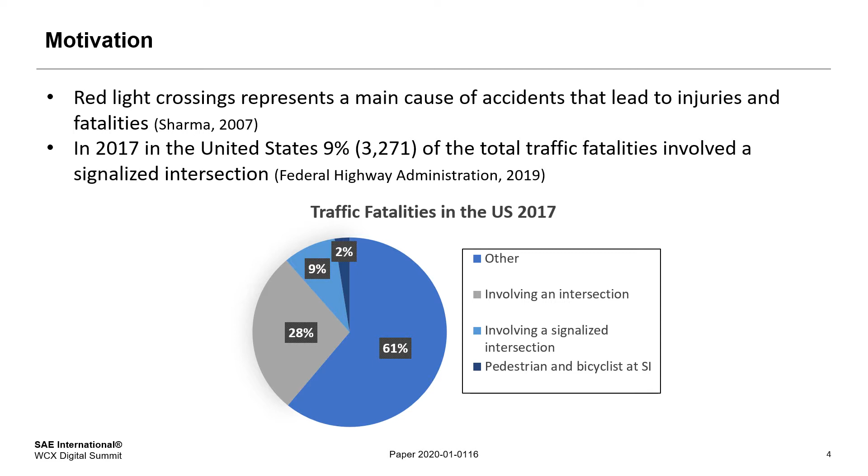Red light crossings are a significant cause of accidents. Just in 2017, 9% of the traffic fatalities had something to do with a signalized intersection in the United States. This is something that we would like to minimize as much as possible. Some manufacturers, like Audi, have started to implement technologies like green light optimized speed advisory, or GLOSA, in their vehicles, and we were wondering what effects these technologies would have on safety.

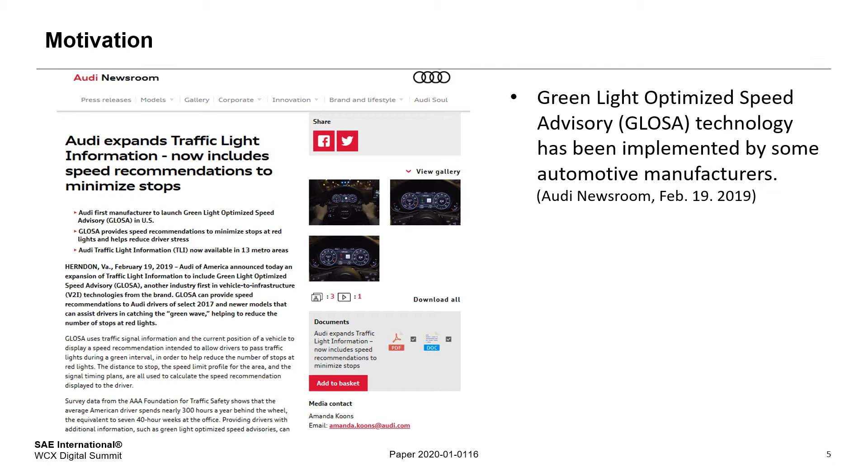The way GLOSA usually works is that typically we will have a roadside unit or cellular device on the intersection that can interface with the controller, and we will have a vehicle that has an onboard unit or cellular device. This would allow for data transfer between the intersection and the vehicle, and information such as the intersection topology, the location, the current phase, and how long the phase is going to last can be transmitted from one side to the other.

After this is done, the vehicle can then process the data and calculate an optimal approaching speed so the vehicle can get to the traffic signal during the green phase of the cycle. There is room for improvement in the sense that few GLOSA studies have taken into consideration actuated traffic signals. Added to this, the negative effects of latencies can also be reduced. Now let's look at the literature review.

Parsonson and Zegeer were able to identify that rear-end collisions and right-angle crashes are a result of dilemma zone exposure. The dilemma zone is an area in which, after an onset of yellow, motorists are not sure if they should continue or stop. This uncertainty increases the risk of an accident. We will look in more detail into this topic later on. Zimmerman was able to mitigate the incursion of vehicles in this zone by controlling signal phases and warning drivers of a possible risk.

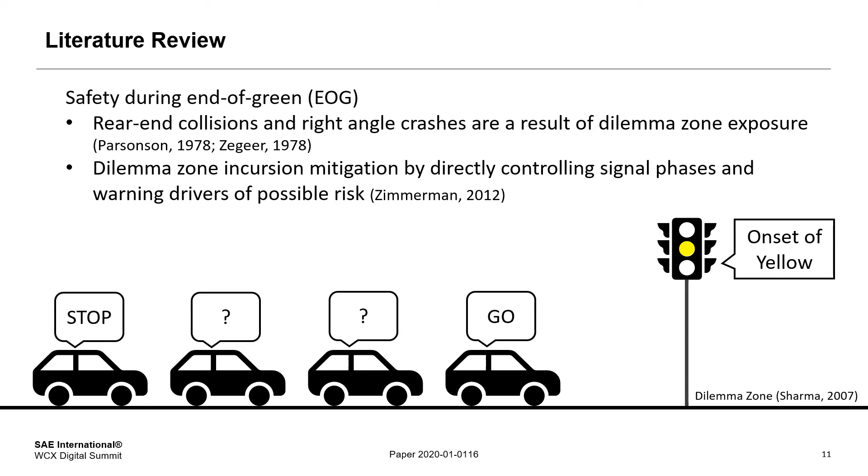Stahlmann found out that GLOSA simulation studies tend to overestimate transmission ranges and message delivery ratios, and it is also important to note that there are GLOSA systems that aim to improve specific aspects, like travel time or fuel consumption.

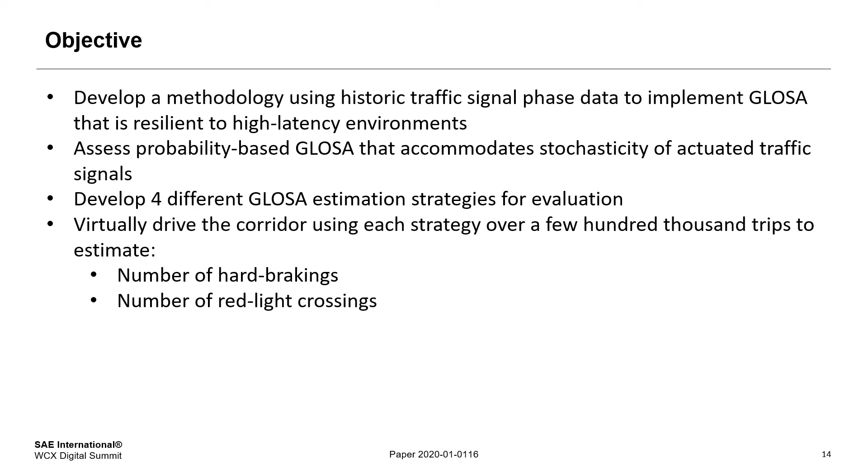The objectives of the study were to develop a GLOSA system that is resilient to high latency environments and that accommodates the stochasticity of actuated traffic signals, to develop four different GLOSA estimation strategies for evaluation, and to virtually drive a corridor using each strategy over a few 100,000 trips to estimate the number of hard braking events and the number of red light crossings.

The novelty of the study is that only a one-time download of historic data is required to provide advisory for the complete route, that the system presents capabilities for actuated traffic signals, and that we're focusing on the effects that the probability-based GLOSA has on safety. Now we can move on to the methodology.

The testing route in which the virtual drives were carried out is a segment of US 231 located in West Lafayette, Indiana, that goes from US 52 to South River Road. You can see in the map all the intersections that are in this segment of the road. And we had two timing plans, one that goes from 8:15 a.m. to 9 a.m. and another one that goes from 9:15 a.m. to 2:45 p.m.

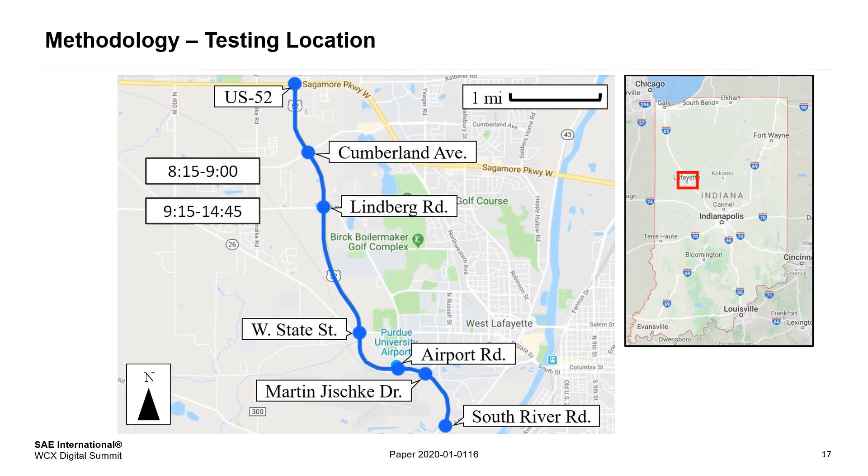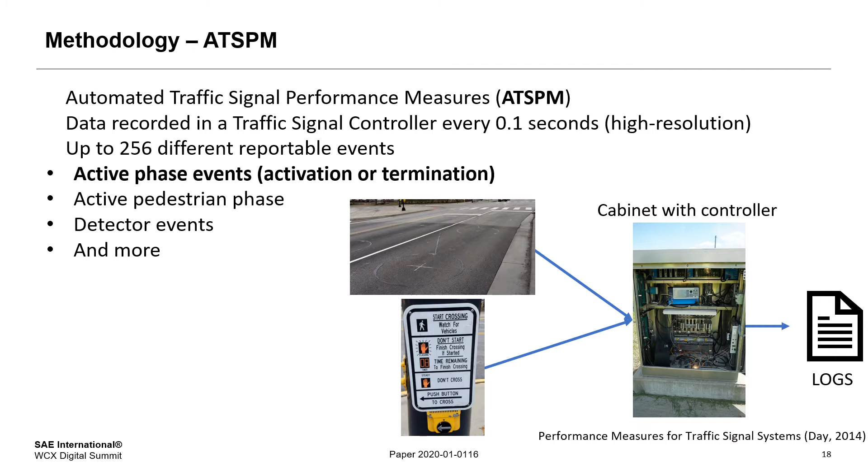To develop the probability-based GLOSA, we needed to access the historic intersection phase events data. So we utilized high-resolution traffic signal controller data, which saves events in log files with a tenth of a second resolution. This way we could know what phases were on at a specific traffic signal at a specific time of day, and we could then calculate probabilities.

For example, if we wanted to travel on Tuesday 19th of March 2019 between 8:15 a.m. and 9 a.m., then we will be looking at the previous week's information with the same time of day, so between 8:15 a.m. and 9 a.m., and the same day of week timing plan. So if we were traveling on a Tuesday, that means we will be looking at events that occurred between Monday and Thursday. This is because the traffic signals have similar timing plans for these days.

Now we're looking at one of the first traffic signal cycles in the current time of day plan when going northbound on Martin Jischke Drive on the Monday before our intended trip. If we focus on a specific time inside the cycle, we can see how different events occur throughout the time of day period. We can see how for the time in cycle 70, one of the first events is a red light. But as we move forward, we start to see different events.

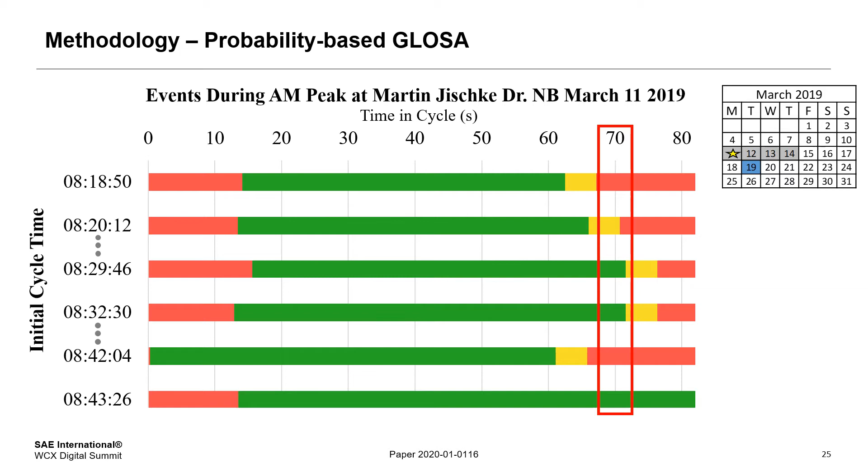At the end, to calculate the probability of the traffic signal to be green at a specific timing cycle, we count how many green events occurred for the entire day of week plan for the same time of day period and divide this number by the total number of cycles that were analyzed. By just looking at a few cycles on Monday 11th, we could predict that the probability of the traffic signal to be green at a time in cycle 70 will be close to 50%.

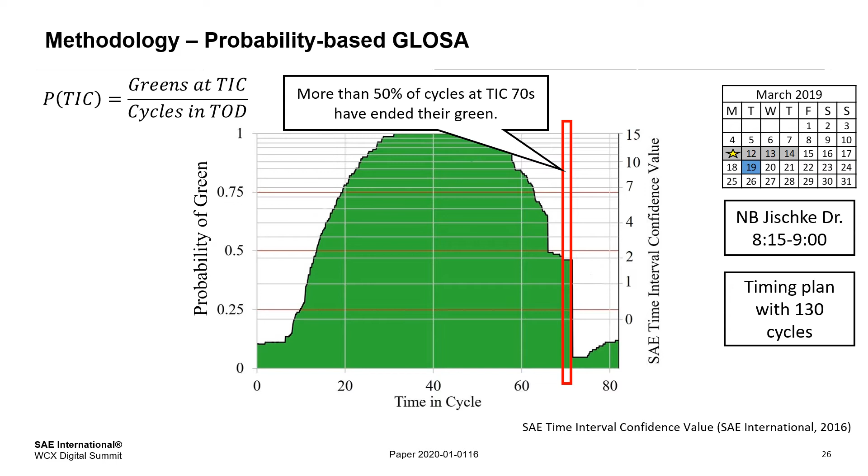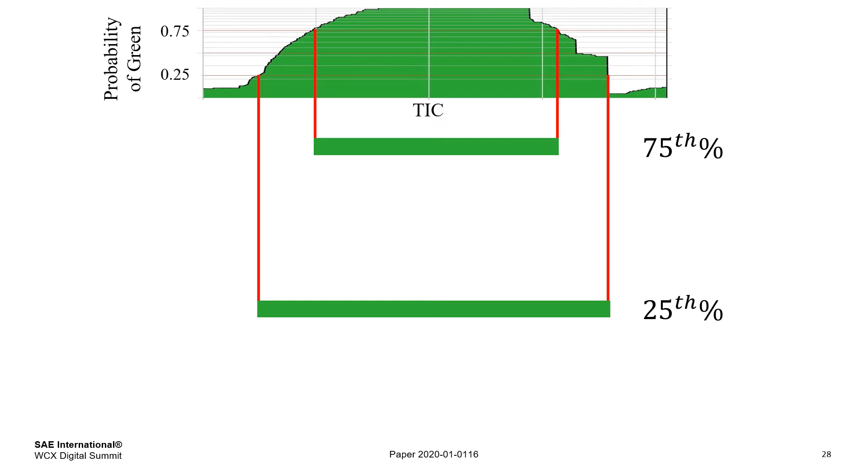Nevertheless, we have to translate the obtained probability profile to a binary advisory. To do so, we make use of thresholds that will make our probability either a green or no green prediction. With a 75th percentile threshold, the predicted green time will look like this. Whereas, with a 25th percentile threshold, the predicted green time will look like this. The different lengths of the expected green time will have different consequences on the advisory outcome.

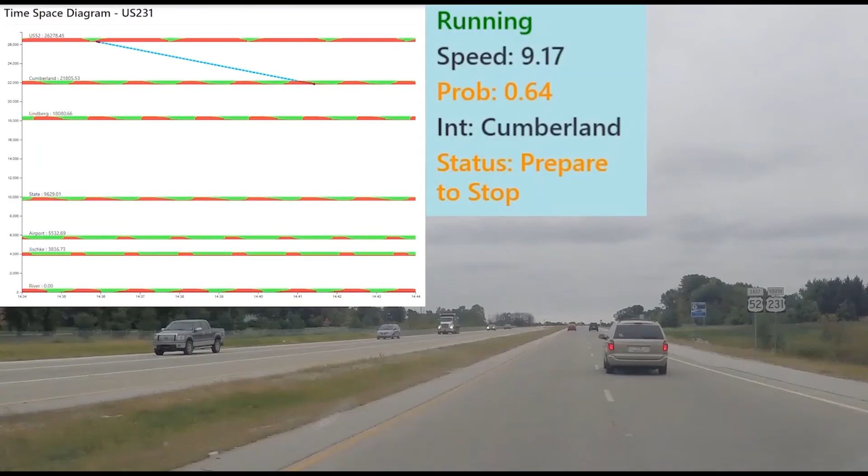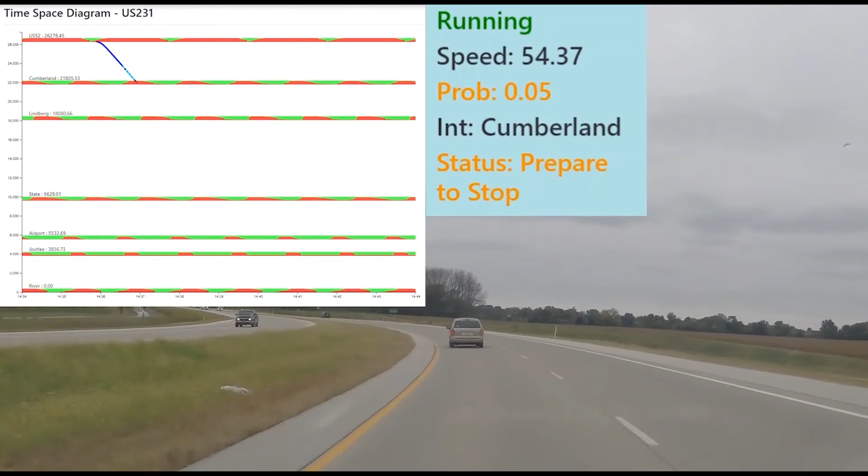This is a short video that shows how the traffic signal phase prediction works. In this case, we are utilizing a 70th percentile threshold to calculate the probabilities. We can see the vehicle's current speed and the current probability of arrival on green. The instant projected trajectory is also shown. For example, now we see a probability of arrival on green close to 0%, so we would expect to arrive on red or yellow. Now, the probability of arrival on green is close to 100%, so we would expect an arrival on green.

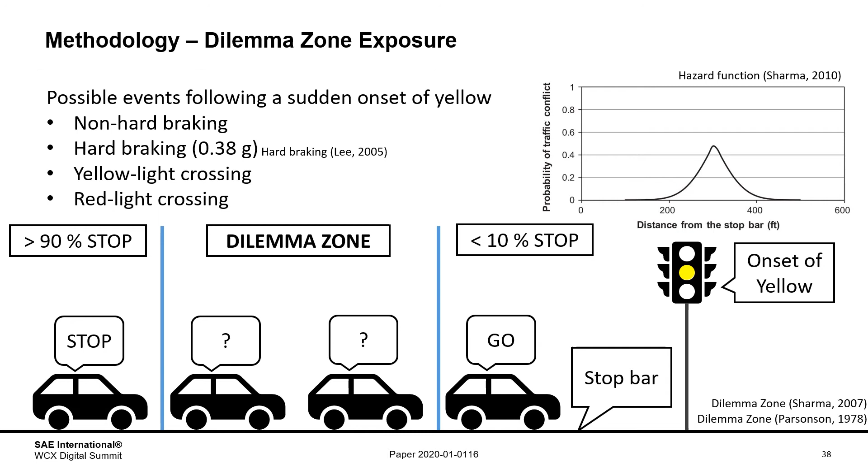We can calculate a vehicle's probability of stopping based on its speed and distance to the stop bar by utilizing a binary logistic regression function that has been designed for light vehicles. If we focus on the most critical point, when 50% of the vehicles would stop, we can obtain a function that provides information on what speed a vehicle needs to be traveling at a certain distance from the stop bar to be located at this critical point.

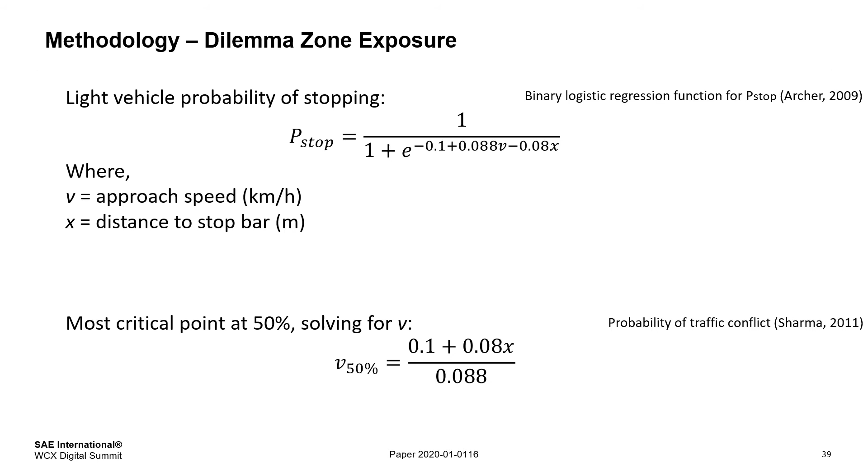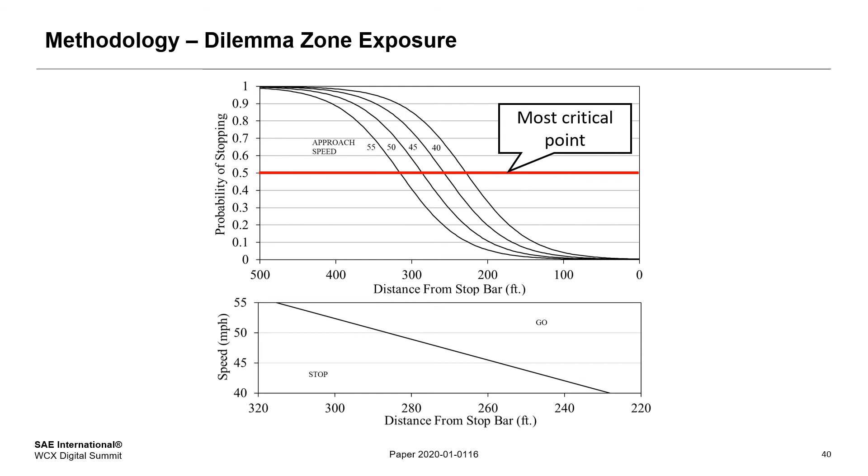Here, we can see the probability of a vehicle to stop depending on their speed and how far away they are from the stop bar. The graph at the bottom shows at what speed a vehicle at a given distance will have a 50% probability of stopping. Vehicles going faster than its speed will be more likely to decide to cross the intersection, whereas vehicles going slower will be more likely to decide to stop.

Regarding the virtual drives, 486,000 trips were driven, phase events were taken from each signal controller's historic data, different GLOSA strategies were tested for each drive, including unadvised, aggressive advisory, balanced advisory, and conservative advisory, and the simulation period was from March 18th to March 21st, 2019. This means that the probabilities were calculated from March 11th to March 14th, 2019.

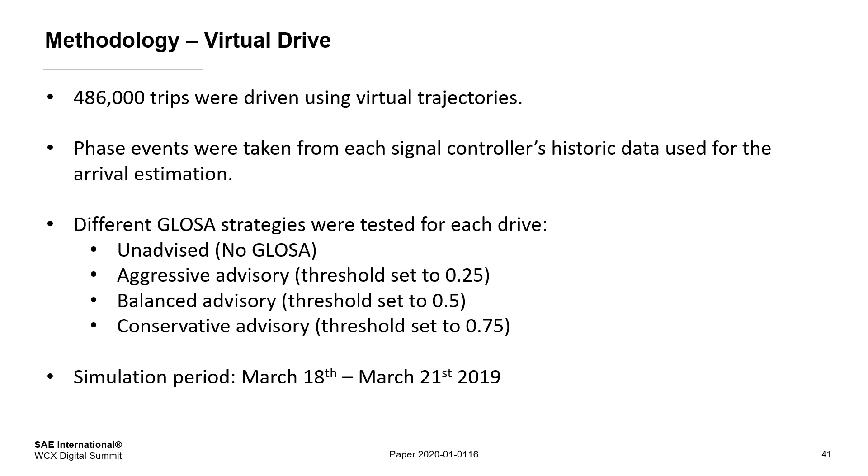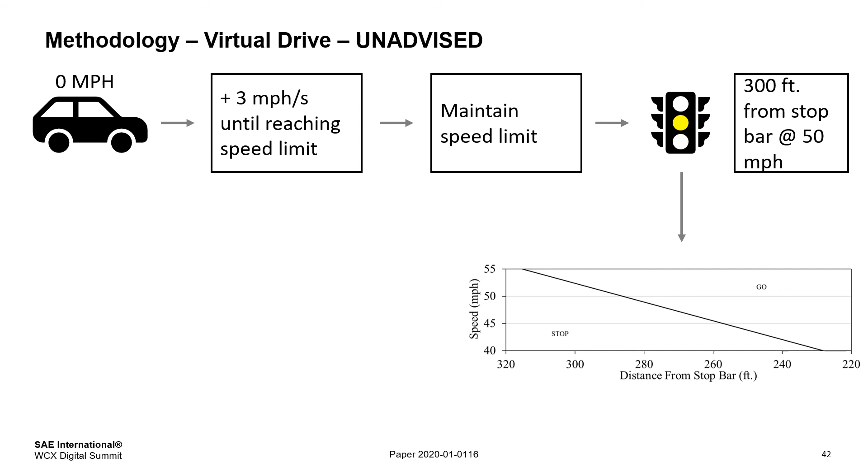The way unadvised trajectories were carried out was with the vehicle starting at a stop condition at the beginning of the route. Then, the vehicle started accelerating at a 3 miles per hour per second rate until reaching the speed limit. At this point, the vehicle simply maintains this speed until a yellow light or a red light are seen. If, for example, the vehicle saw an unexpected onset of yellow 300 feet away from the stop bar while traveling at 50 miles per hour, the speed and distance would then be compared to the critical speed function. If the speed at the specified distance is lower than the critical speed, then the vehicle stops in the virtual drive.

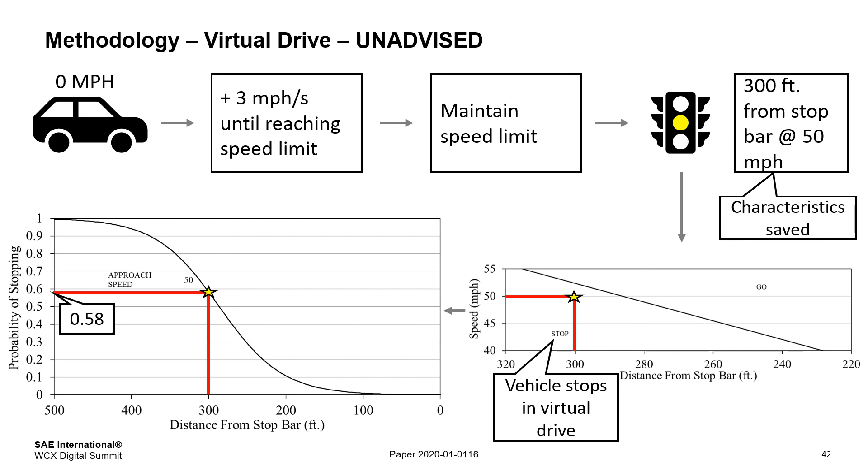Nevertheless, if we plotted this point in the binary regression function, we would obtain the real probability of this vehicle to stop. For this reason, the vehicle's speed and distance to the stop bar when the onset of yellow occurred are saved. At the end, post-processing calculations were done with the entire analysis data to obtain how many vehicles decided to stop and under which circumstances. The way advised trajectories were carried out is similar to the unadvised trajectories.

First, the vehicle starts at a stop condition at the beginning of the route. Then, the vehicle starts accelerating at a 3 miles per hour per second rate until reaching the speed limit. At this point, we start using GLOSA. If green is not predicted to be possibly reached, then the driver is advised to prepare to stop. If green is predicted to be possibly reached, then the vehicle modifies its speed at a 1 mile per hour per second rate within a permitted speed range that goes from the speed limit to a specified minimum speed.

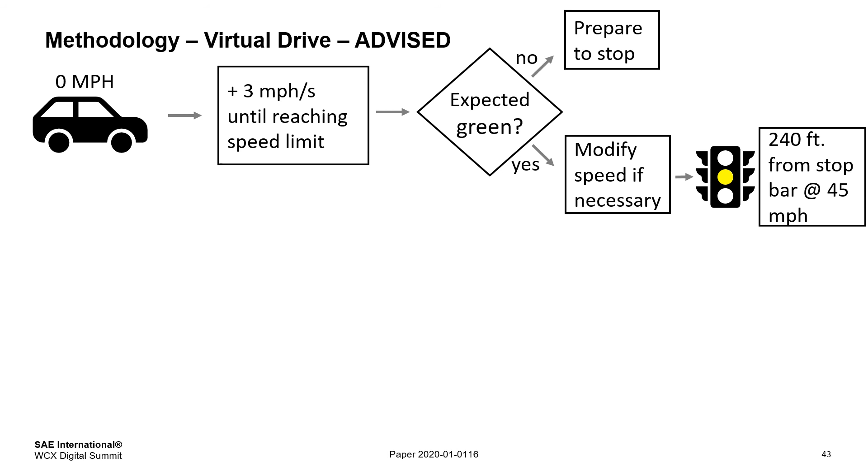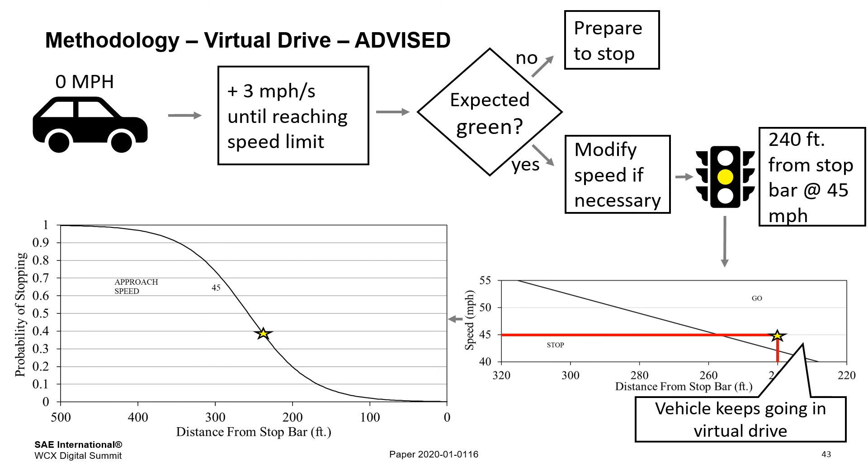If, while predicting an arrival on green, the vehicle saw an unexpected onset of yellow 240 feet away from the stop bar while traveling at 45 miles per hour, the speed and distance would then be compared to the critical speed function. If the speed at the specified distance is faster than the critical speed, then the vehicle keeps going in the virtual drive. Nevertheless, if we plotted this point in the binary regression function, we would obtain the real probability of this vehicle to stop, or in this case, to keep going. Finally, we save the vehicle's speed and distance to the stop bar when the unexpected onset of yellow occurred for post-processing purposes.

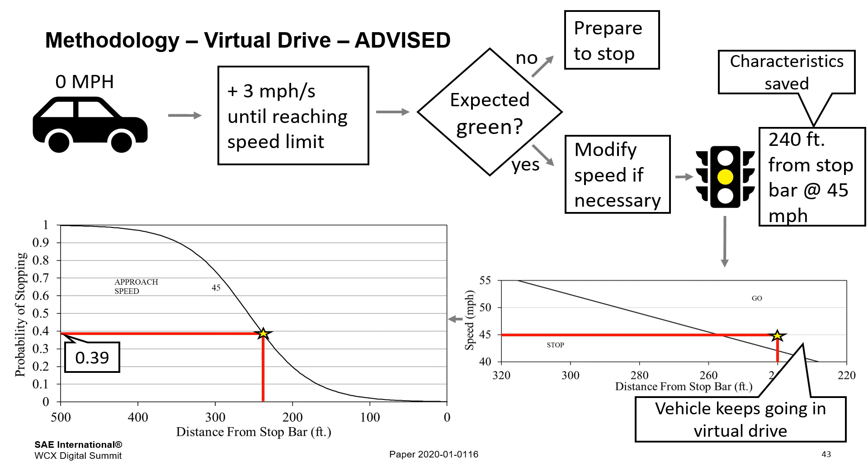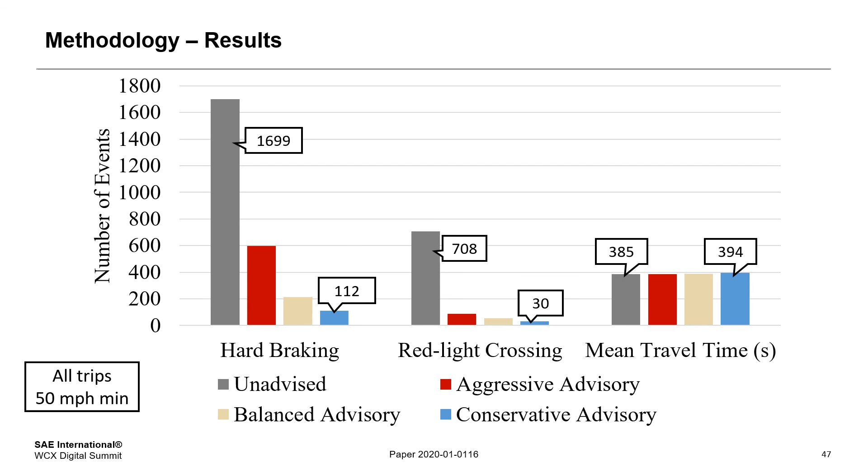The downside of the advisory is that it increases the travel time since it sometimes makes drivers slow down unnecessarily. The average travel time went from 385 seconds when traveling unadvised to 394 seconds when using a conservative advisory. So there was only a 9-second increase. In conclusion, the proposed probability-based GLOSA system showed that it would improve safety during the end of green, since reductions of 96% of red light crossings and 93% of hard-braking events were accomplished. Travel time only increased by 24 seconds in the worst case. The future work consists of incorporating fuel consumption models and performing field tests.